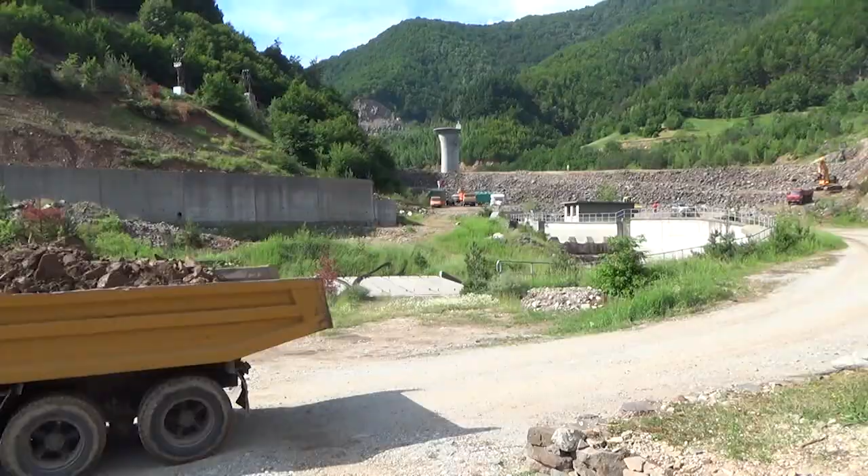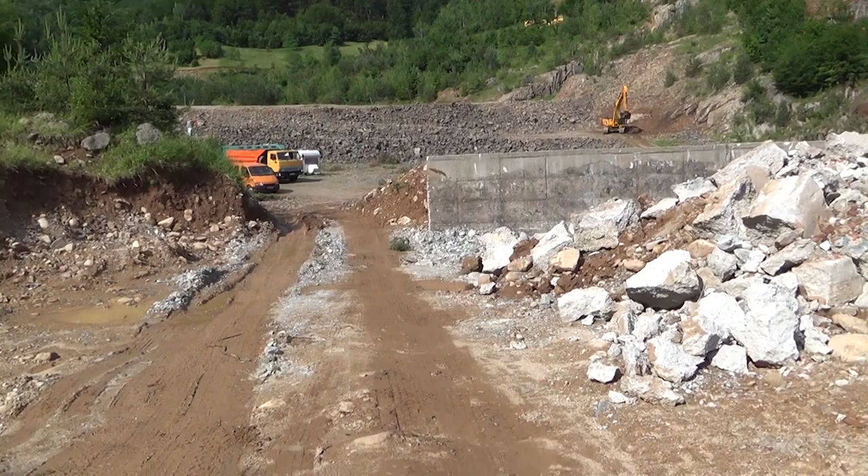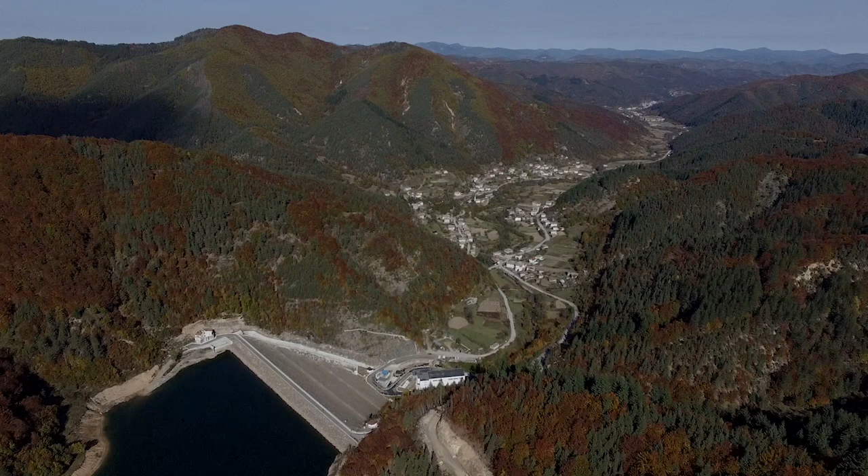The dam Plovdivtsi is located in the southern part of the Rhodope Mountains, Smolyan area, near the Greek border. The dam is built in the valley of Iskrets River, near the village of Plovdivtsi, 14 kilometers away from the town of Rudozem. The dam is public state-owned property managed by the Ministry of Regional Development and Public Works. It is part of a joint project between the Ministry and the World Bank, Municipal Infrastructure Development Project, amounting to 170 million leva.

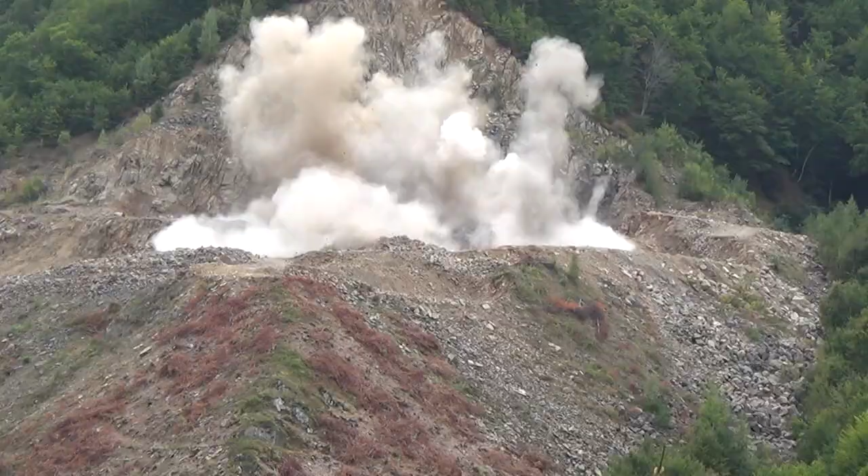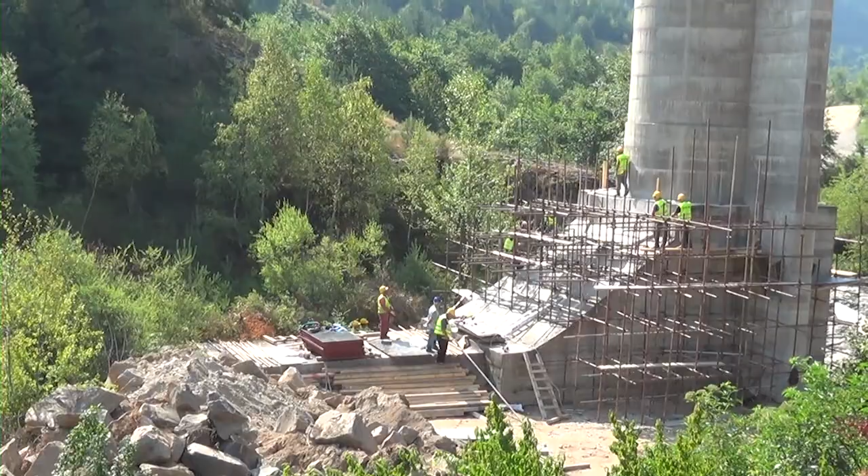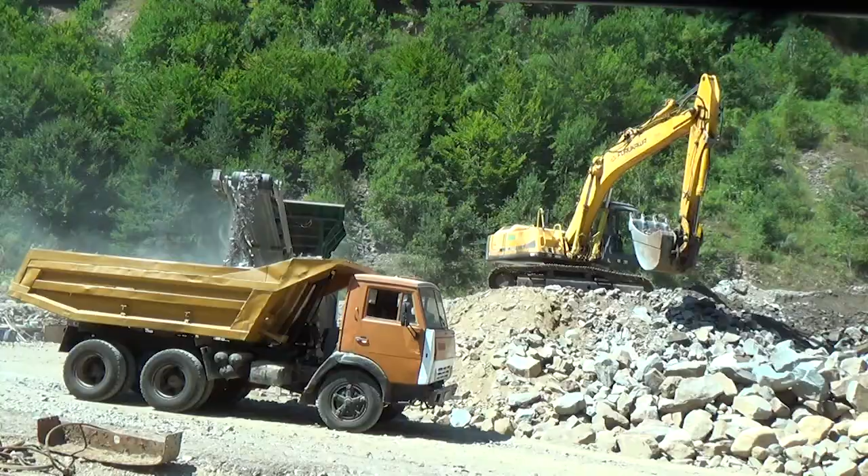The project consists of 3 components, where the third covers the completion of Plovdivtsi and Luda Yana drinking water supply dams, the rehabilitation of the operating dams at Studena, as well as the rehabilitation of the drinking water treatment plant Studena Pernik. The investment project of the dam Plovdivtsi is planned by the Ministry of Regional Development and Public Works and aims to improve the quality of water supply for the population of the towns of Rudozem, Madan, Srednogorci, as well as 35 other villages in the Smolyan area, with about 40,000 inhabitants.

The construction of such a treatment plant is particularly important for improving drinking water quality. So far, the settlements in Rudozem municipality, Madan city and Madan municipality were supplied with water from 67 water sources, including surface basins and springs. These springs are characterized by variable debit, meaning that during summer low water flow, the flow rate abruptly decreases, while in spring and autumn periods of high water, the flow increases, but the water quality deteriorates.

The initial research and design of the project was carried out from 1980 to 1985 by Vodokanal Engineering. The dam is designed as an annual equalizer for the water supply with a total water volume of 2.45 million cubic meters. Construction began in 2000 and continued in line with technical work projects until it was discontinued in 2001 due to lack of funding.

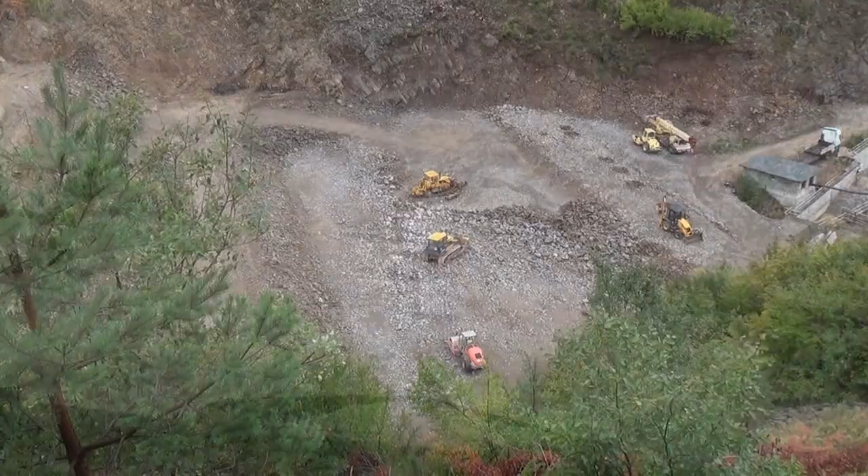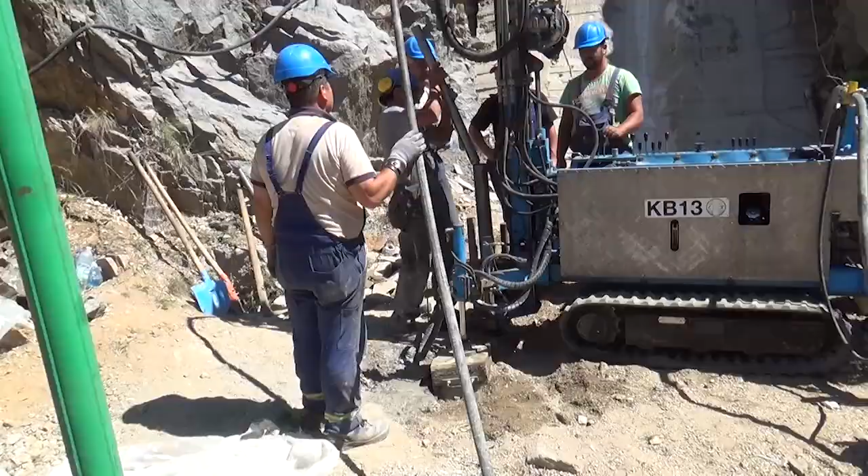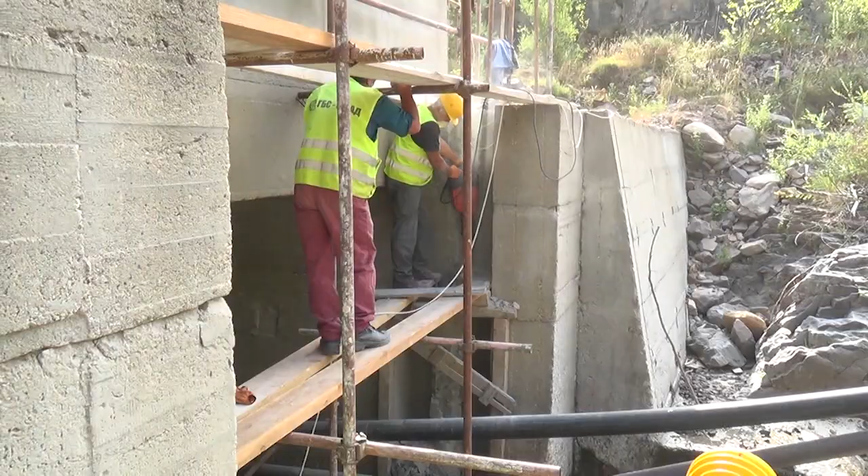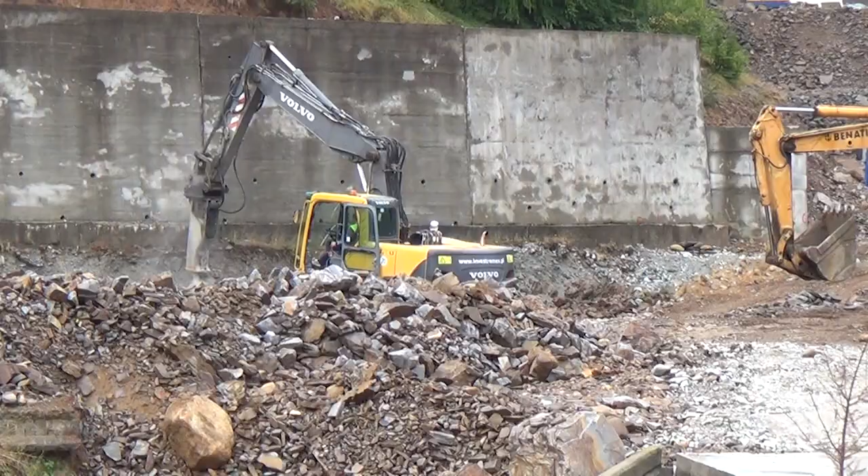After several years, work on the project was resumed. The contract for construction of the dam Plovdivtsi and the drinking water treatment plant was signed in December 2014, and actual construction started at the beginning of 2015. The project was assigned to the consortium Plovdivtsi, with leading partners the Russian company Zarubezhvodstroy, the Bulgarian GBS Infrastructural Construction, and the Spanish Arima. The operator of the dam is Water Supply and Sewerage Smolyan.

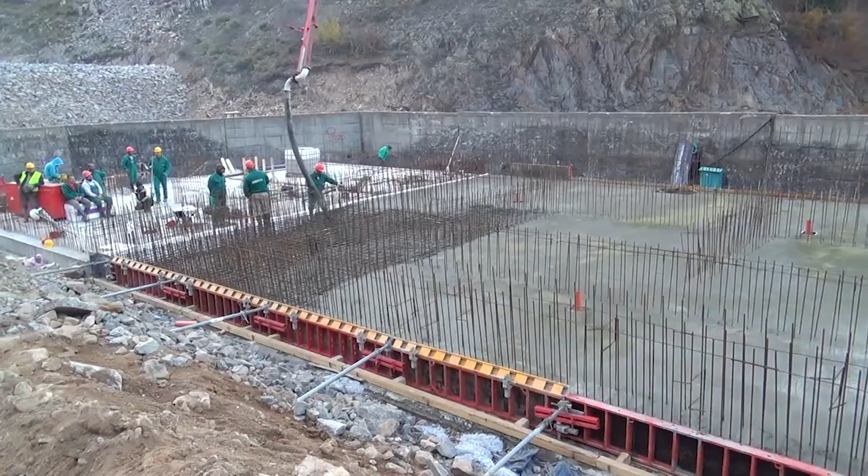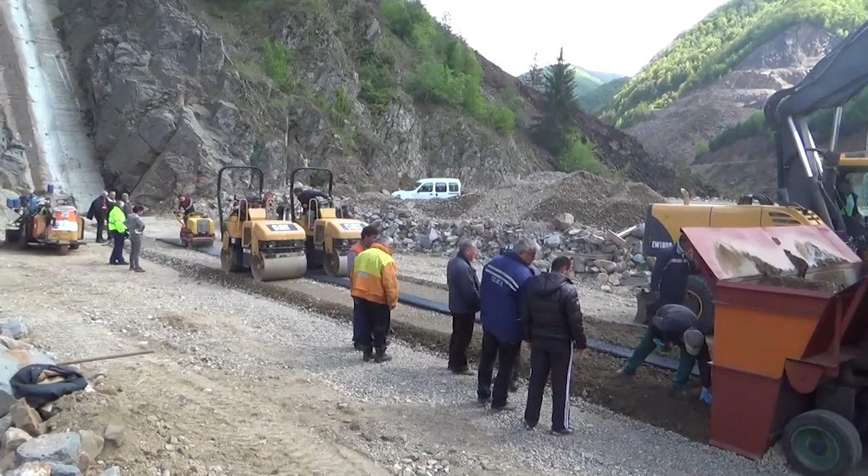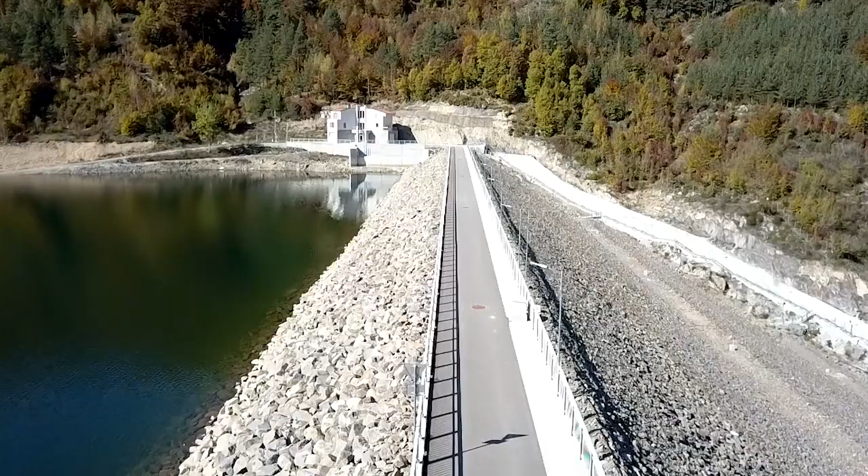The value of the contract works is 47.4 million leva. Its real value is estimated at about 36.5 million. According to normative documents, the lifetime of this facility is 100 years. The volume of the dam is 2.45 million cubic meters. The construction of the hydro scheme includes a dam, a cofferdam incorporated into the dam, a water tower with drop inlet spillway and low-level culvert, a diversion gallery, a potable water treatment plant, and a service building for the exploitation of the dam.

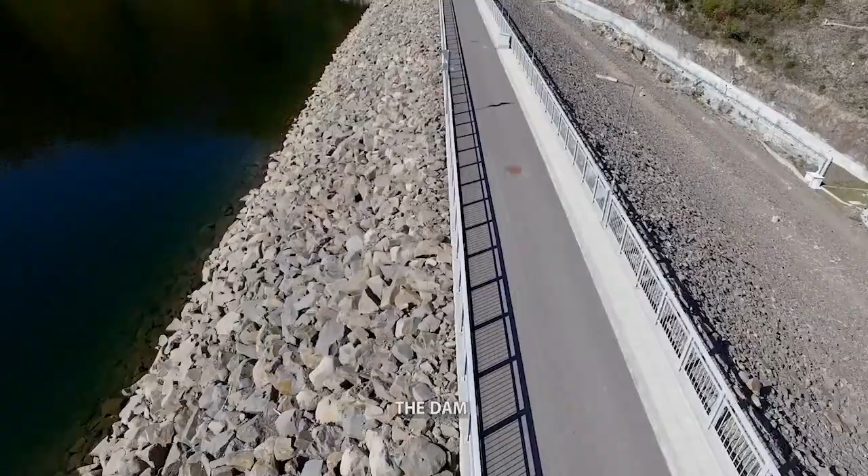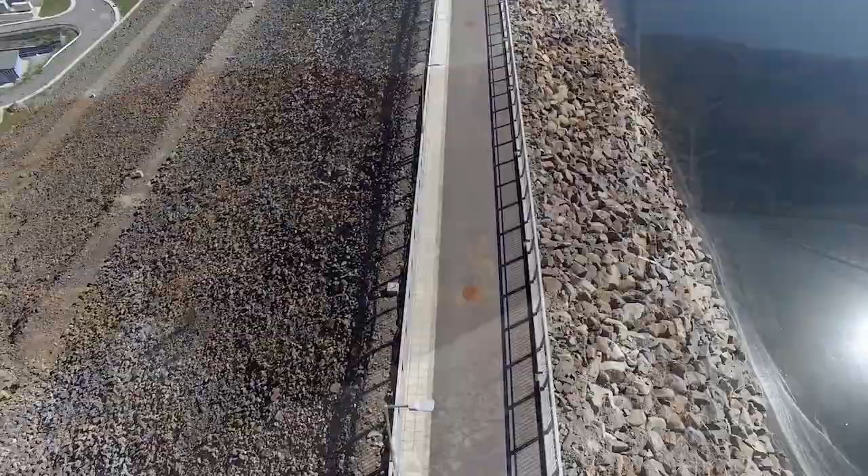The type of the dam is rock-filled with an asphalt concrete diaphragm founded on a concrete slab 60 centimeters thick. The diaphragm from both sides is connected to the dam shoulders by filters and transition zones. The upstream slope is protected by stone cladding. The height of the dam is 52 meters 25 centimeters, while the length of the crest is 225 meters. A 6-meter wide, single-lane, 3.5 meter asphalt road is arranged along the dam's crest.

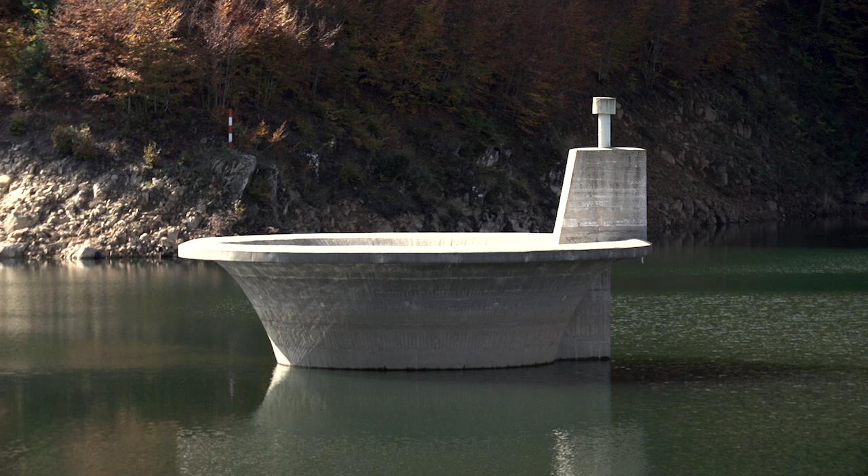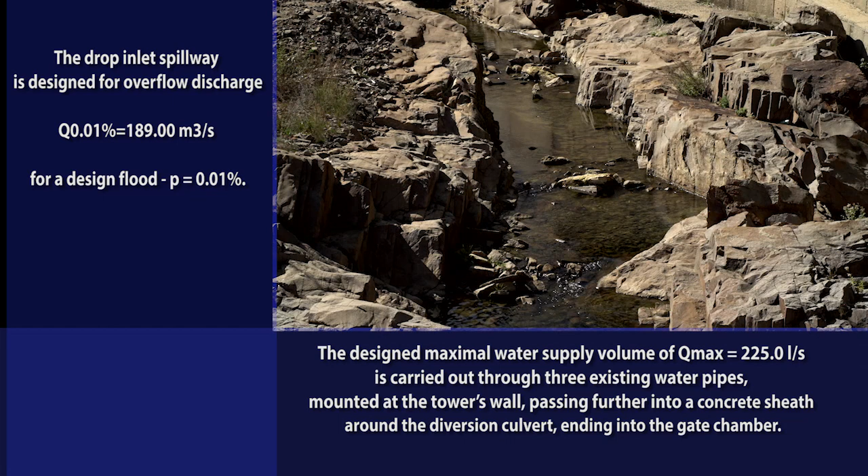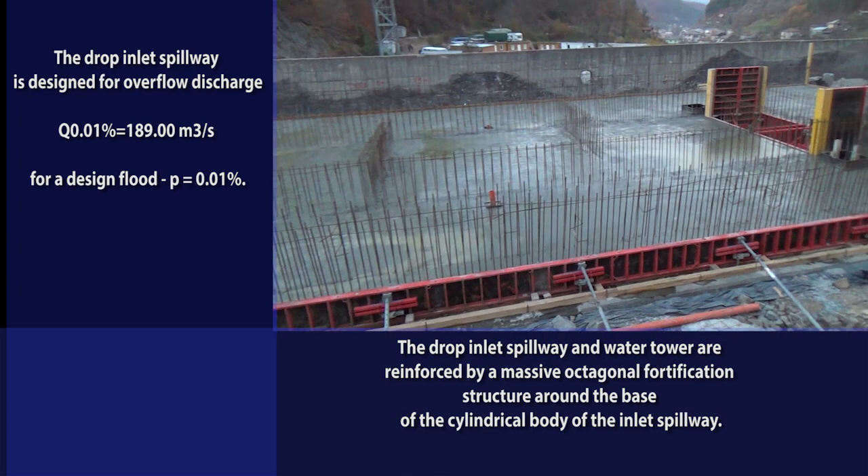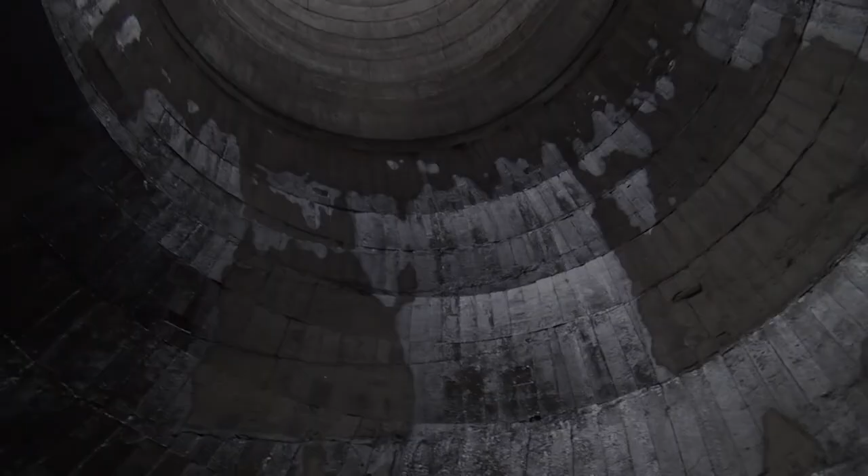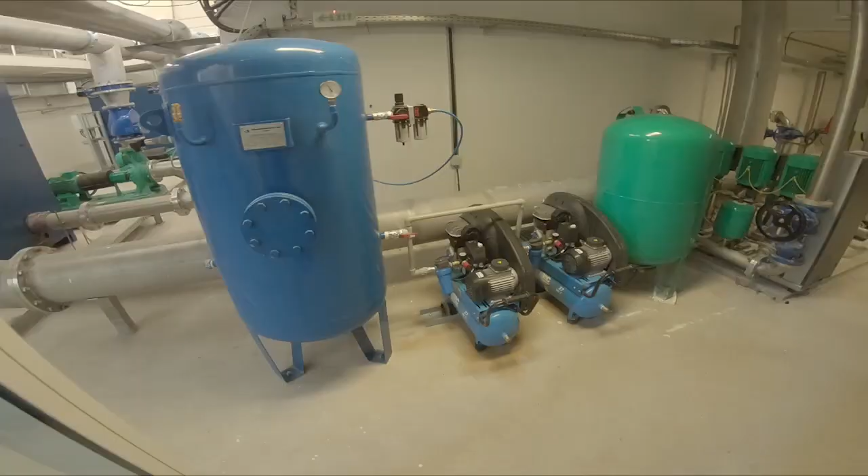The low-level culvert is built of spiral welded steel pipes. Together with the 3 water pipes, it is incorporated in a common concrete sheath. The alignment of the culvert is parallel to the diversion gallery. At the end, before their connection to the gate chamber, the pipes split, retaining their parallel position to each other at their insertion to the chamber. For regulation of the water discharge of the dam, in the gate chamber, the low-level culvert is provided with an electrically-driven piston valve.

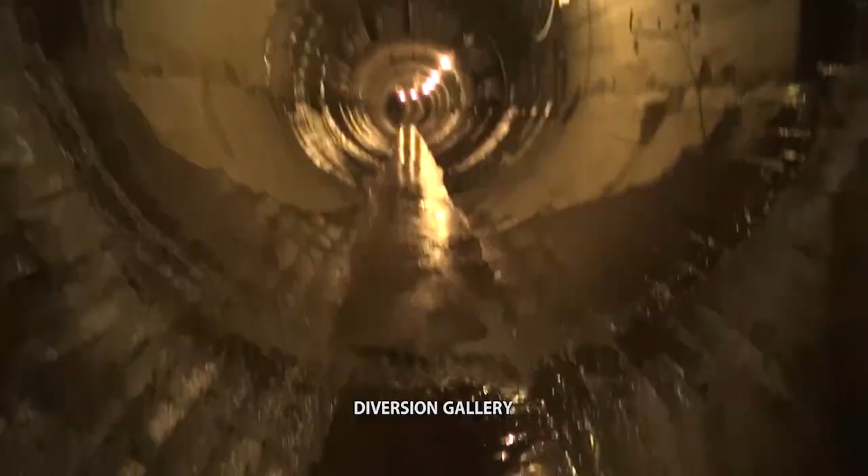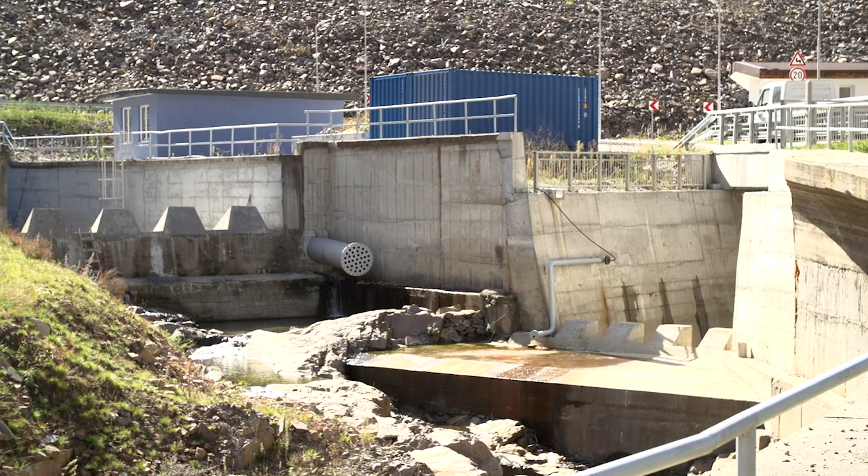The diversion gallery is 224 meters long, with a constant bottom inclination of 3.46%, and after the reconstruction of the structure, it serves for diversion of high floods after the low-level culvert. The design water discharge Q 0.01% is 160 cubic meters per second, passing the structure as free flow.

The gallery ends into a plain rectangular canal, at the end of which a ski jump device is constructed. The length of the canal, together with the ski jump, is 26 meters. At the end of the ski jump, 4 baffle piers are designed to reduce the impact of the falling water on the terrain.

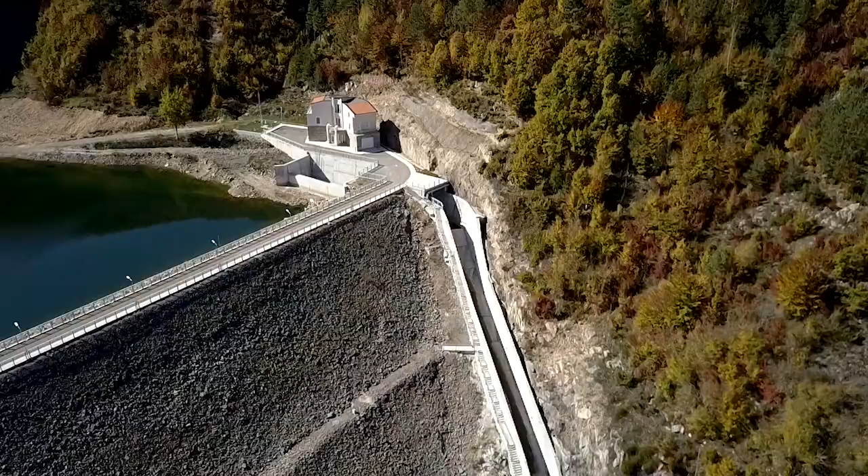The trench spillway is one-sided, with a length of the overflow crest of 17 meters, and width of the trench 3 meters at the beginning and 4 meters at the end of the structure.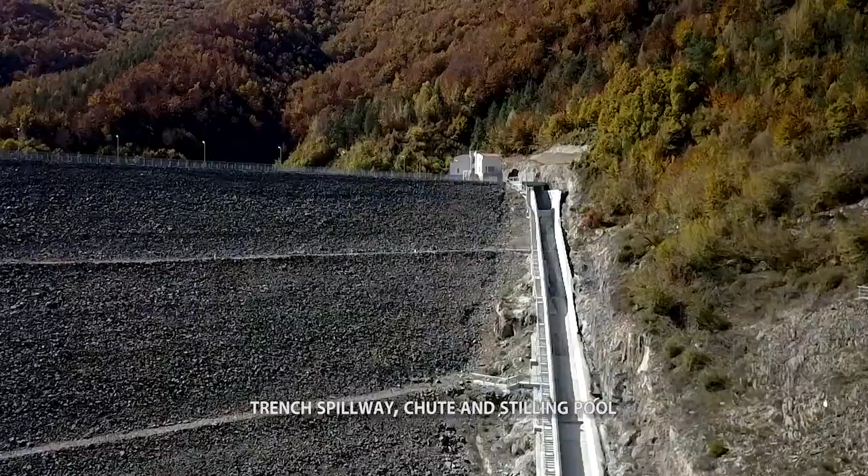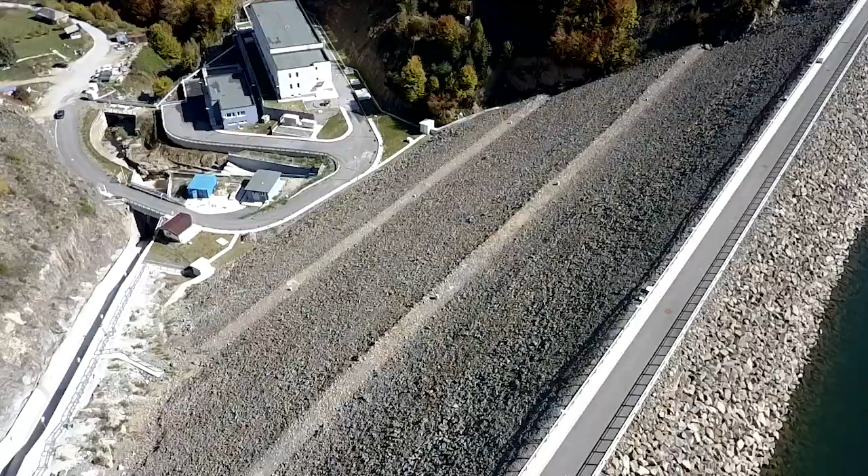The chute is an open trapezoid canal with a length of 139 meters and a 3 meter width of the bottom at the beginning, smoothly widening to 5 meters in the last 3 sections, reaching the width of the stilling pool. The chute ends into a stilling pool. The bottom of the stilling pool is 5 meters wide and 16 meters 20 centimeters long. 4 baffle piers are built at the end of the pool.

The gate chamber at the beginning of our construction works was an existing structure. It represents a massive building with concrete walls dug into the dam body and a reinforced concrete skeleton with brick masonry above ground level. The gate chamber is supplied with spare parts and equipment for repair works for the low-level culvert and the 3 water pipes.

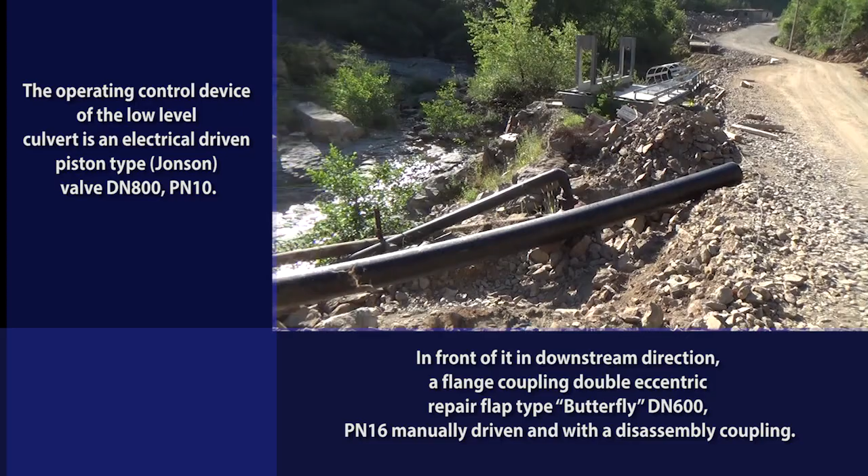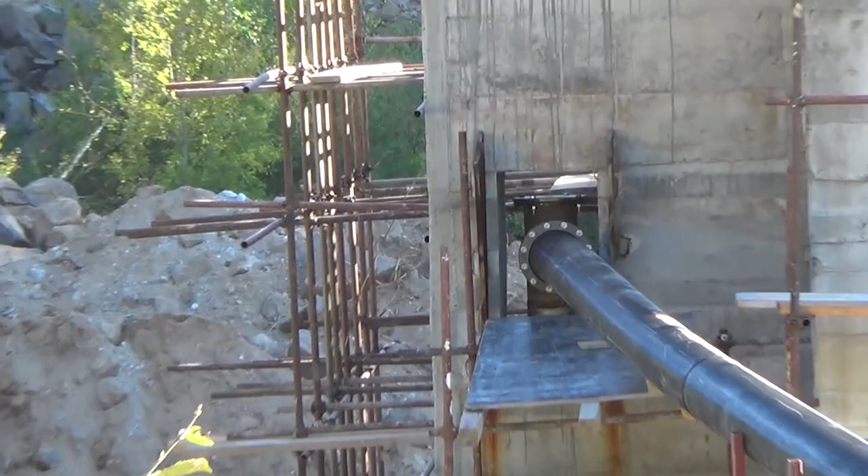The designed volume of the potable water treatment plant is 225 liters per second. 15 liters per second of that are for its own needs, and the remaining 210 liters per second for water supply. The area around is organized to ensure place for a meteorological station and parking places for the staff.

The main appurtenant structures on the territory of the potable water treatment plant are as follows: inlet and outlet distribution shafts, inlet and outlet measuring devices, technological building, administrative building, technological building for wastewater treatment, surge tank for the wastewaters, chlorination unit, and service building for the exploitation of the dam.

The physical protection of the first sanitary zone along the whole perimeter of the dam is secured by a fence 1.8 meters high with 2 combined gates for pedestrians and vehicles, provided with locking mechanisms. Automatic security barriers have been installed, alarm and video systems, as well as a fence system of steel railings have been built.

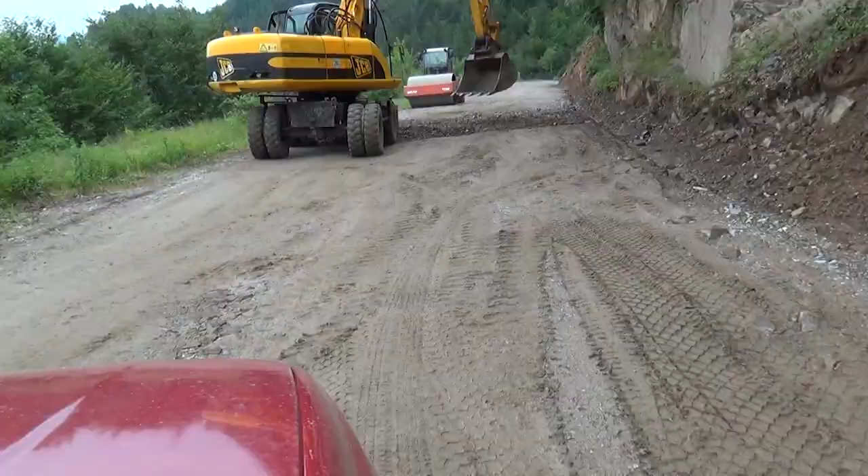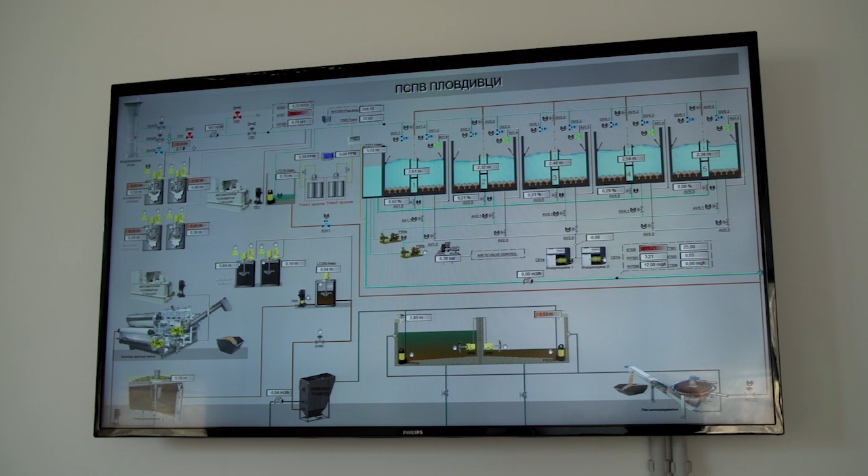An important condition for the economical and social development of the municipalities of Madan and Rudozem, including as a tourist destination, is the provision of a normal supply of water of the required quality. Improving water supply for drinking will prevent the emergence of epidemic diseases by waterway.

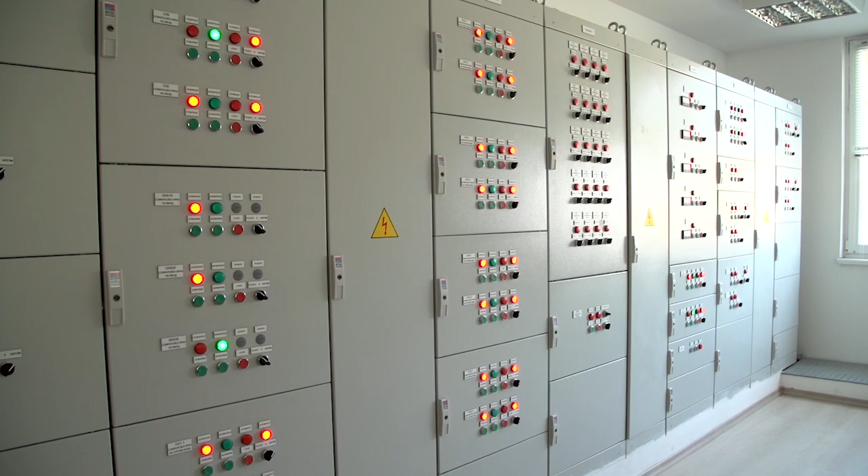The population now has the opportunity to consume water meeting the Bulgarian and European standards. The construction of the dam Plovdivtsi provides a normal water supply for the population in these municipalities, while creating the opportunity for a better ecological condition of the Iskrets River and development of certain recreational activities.

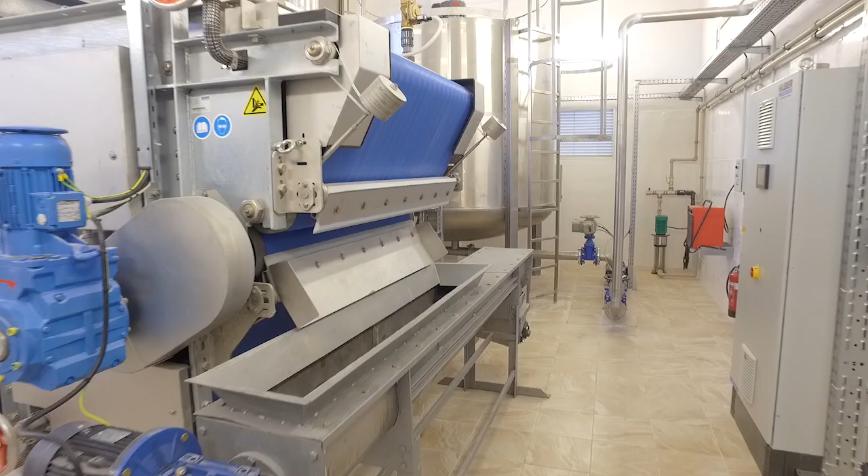In addition, operation of the facility is expected to have a beneficial effect on the population. The opening of new jobs and the creation of recreation areas near the dam are expected.

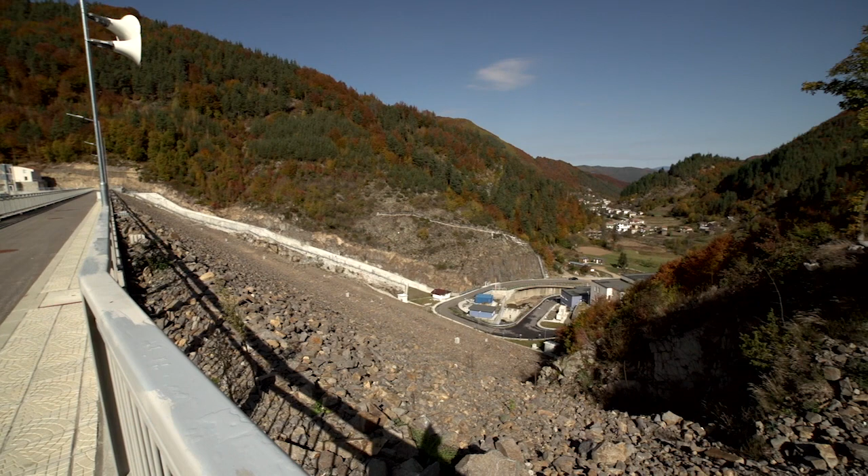The construction of the dam will also help to regulate the water runoff and the protection against potential floods of the villages below the dam, as well as infrastructure and arable land, while improving the microclimate in the area of the lake.

The dam Plovdivtsi has a positive impact on the river ecosystem under the wall, providing water supply and creating good opportunities for fish populations both in the water reservoir and under it. Gradually, opportunities for new habitats of the animal world and enrichment of amphibians, reptiles, mammals and birds in the range of the river are being created.

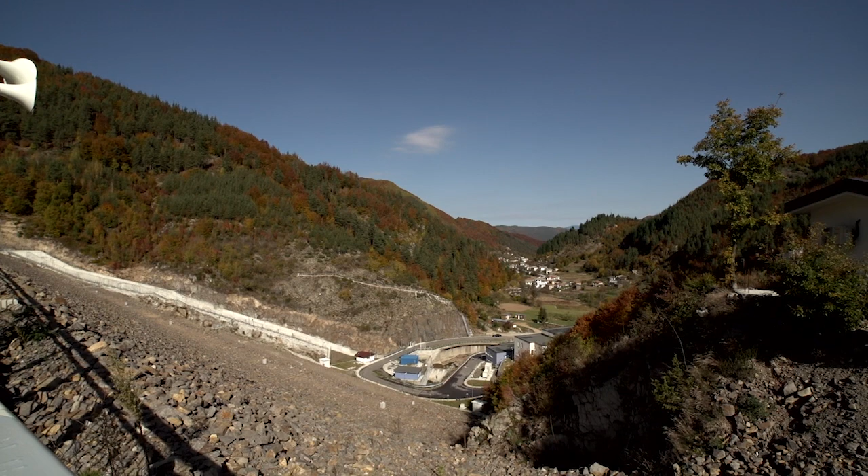The dam Plovdivtsi is the first such site to be built in Bulgaria in the last 30 years. To summarize, the implementation of the project ensures better water supply and responsible use of water resources, laid down in the state policy for the sustainable development of the water sector, meeting the requirements of the European directives in the field of drinking water supply.